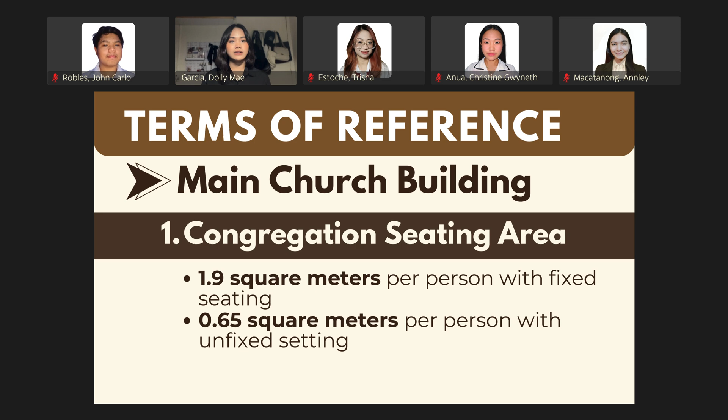Aisles must adhere to minimum width requirements of 0.9 meters for minor aisles and 1.2 meters for major ones. The sanctuary, an essential ceremonial space, should have at least 1.2 meters of clearance around the altar for ease of movement, as guided by IBC standards.

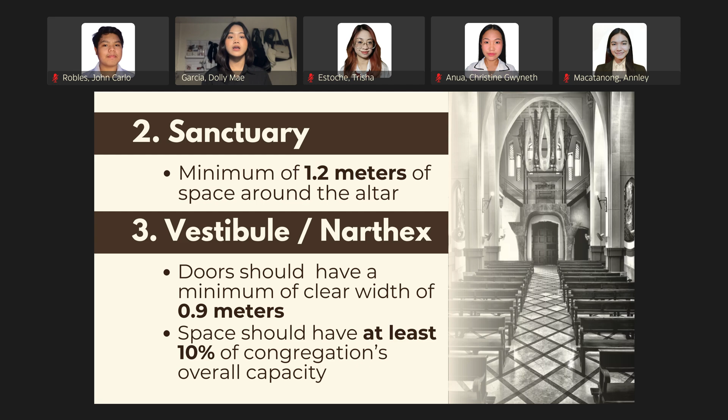The vestibule requires outward swinging doors with a minimum width of 0.9 meters while providing standing room for 10% of the congregation's capacity. Additionally, the choir loft must support a live load of 5.0 kilopascals and offer 600 millimeters per individual to ensure sufficient space for sheet music and instruments.

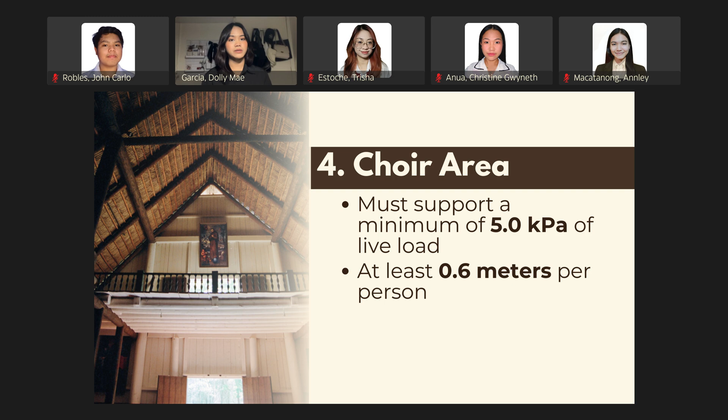The multi-purpose building is designed for various functions such as classrooms, offices, and kitchen facilities. Classrooms must provide 1.9 square meters per person with at least 2 exits if occupancy exceeds 50 individuals, while offices require 4.65 square meters per person. To support flexibility and productivity, it is recommended to use soundproof wall materials and adaptable layouts in office spaces.

Lighting and ventilation play a critical role in maintaining a safe and comfortable environment. Emergency lighting, as required by NBCP Section 1207 and the Philippine Electrical Code, must provide visibility during power failures and emergency situations. Also, exit signs must be illuminated with backup power sources, ensuring functionality for at least 1.5 hours.

Natural lighting should constitute at least 10% of the floor area, ensuring a balance of functionality and energy efficiency, as mentioned in NBCP Section 808. In ventilation, here are some significant points to be considered.

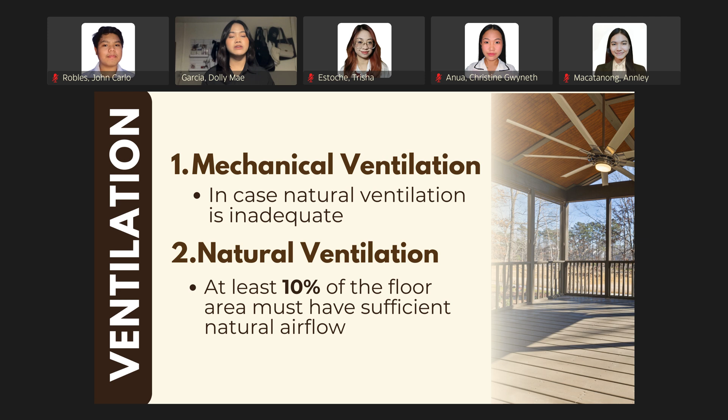An assembly space like a church must include a combination of natural and mechanical systems to maintain air quality and circulation. Following NBCP 808, to have sufficient natural airflow, it mandates openings that cover at least 10% of the room's floor area by having spacious windows, tall ceilings, and an open design layout.

On the other hand, if natural ventilation is inadequate, it is necessary to install mechanical ventilation systems like air handling units and ceiling fans. Next is the exhaust system, adding exhaust ducts that release air externally and adhere to Philippine Society of Mechanical Engineers standards to ensure effective removal of pollutants.

Lastly, to ensure air quality and indoor comfort, it is recommended to utilize HEPA filters or air purifiers to eliminate carbon dioxide, moisture, and odors in a busy area. By adhering to these guidelines, the proposed design ensures functionality, safety, comfort, and adaptability for various uses, making it a welcoming space for the congregation and the community.

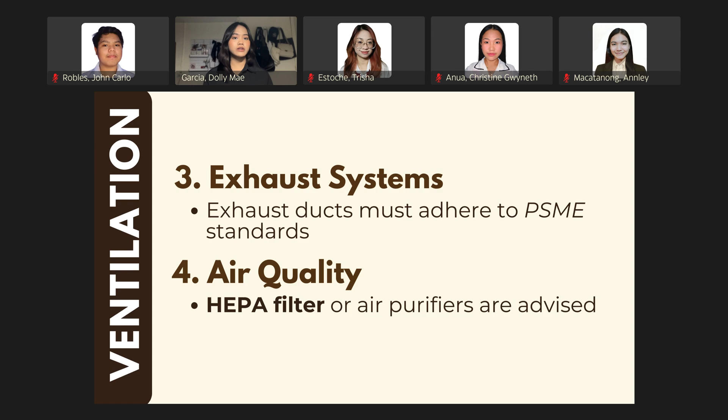The Fire Code of the Philippines emphasizes safety in emergency situations, especially in areas where large groups gather.

For the congregation seating area, the occupancy load is calculated at 0.65 square meters per person, meaning a 1,000 capacity requires a minimum of 650 square meters. To ensure a smooth evacuation, at least 4 exits with unobstructed aisles, illuminated emergency signage, and doors that swing in the direction of egress are required.

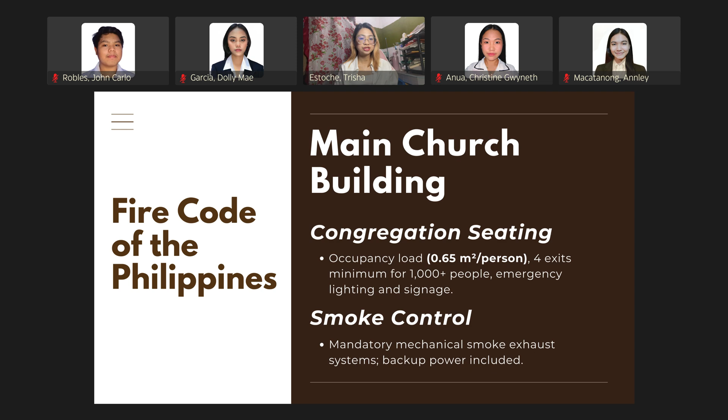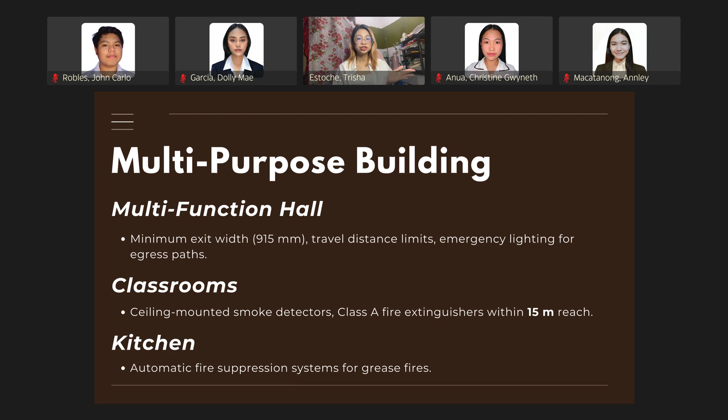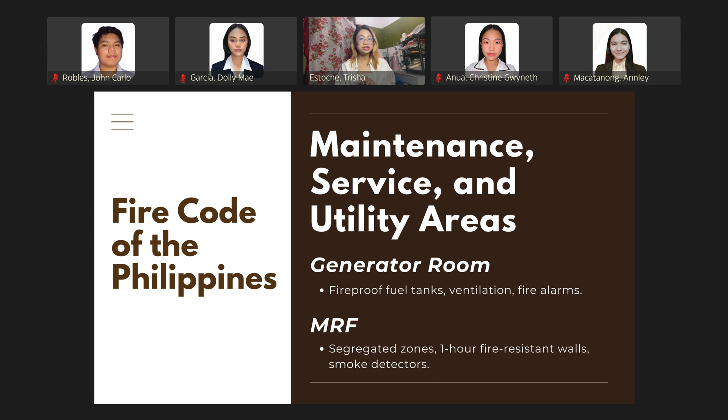Smoke control systems such as mechanical exhaust fans are mandatory to prevent visibility obstructions during emergencies. High-priority areas like the sanctuary will use fire-resistant materials, while public restrooms will be equipped with automatic sprinklers and smoke detectors. Spaces like the multifunction hall, classrooms, kitchens, and outdoor plazas must also comply with fire safety standards, incorporating features like emergency lighting, fire suppression systems, and designated assembly points.

Inclusivity is addressed through BP 344, which ensures accessibility for all individuals, including persons with disabilities. Wheelchair-accessible seating will make up 2% of the congregation seating, strategically placed to provide clear sight lines and proximity to companions. Elevated areas like the sanctuary and choir loft will feature ramps with a 1:12 slope and platform lifts. Public toilets will include grab bars, tactile braille signage, and wide doors for wheelchair access.

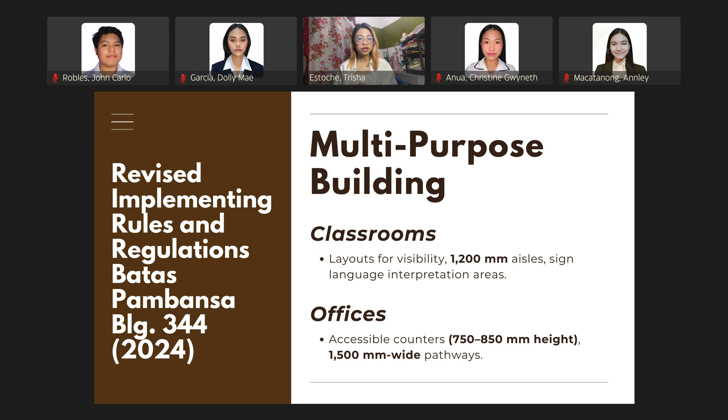Classrooms will have layouts catering to deaf and mute learners with clear sightlines to instructors and interpreters, while offices will incorporate accessible counters and 1,500mm wide pathways. Outdoor spaces will provide designated PWD parking, slip-resistant pathways, and sensory-friendly features like tactile sculptures.

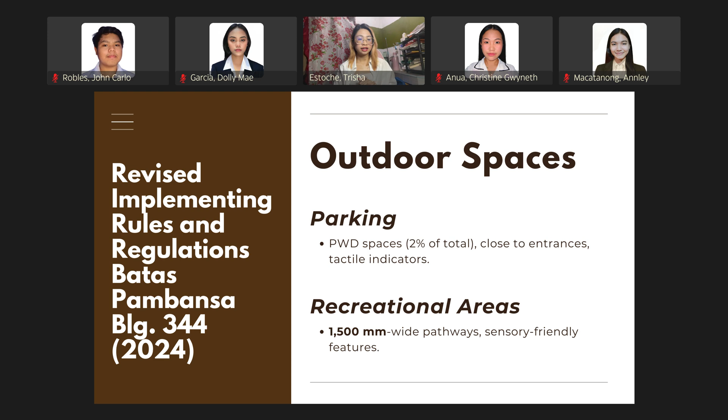The Philippine Green Building Code prioritizes sustainability and energy efficiency. The nave will utilize natural daylighting through clerestory windows and reflective materials to reduce artificial lighting needs. Cross-ventilation will minimize reliance on air conditioning, while energy-efficient LED lighting and renewable energy sources like solar panels will enhance the sanctuary's sustainability. Public toilets will incorporate low-flow fixtures and rainwater harvesting systems for flushing.

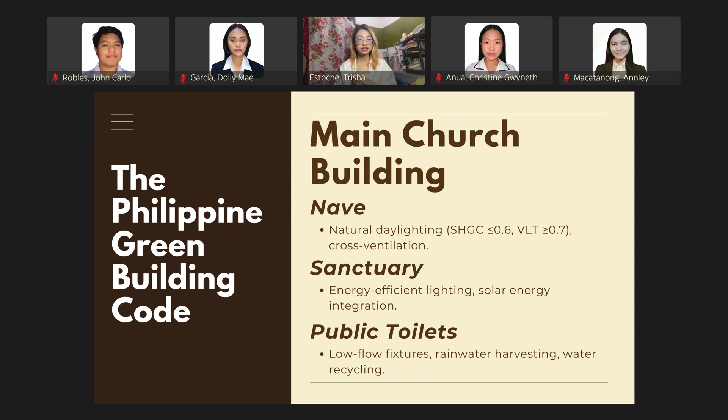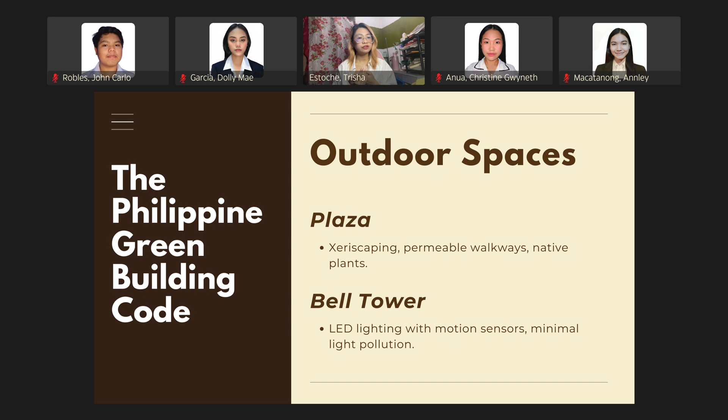The multifunction hall will feature reflective roofing, passive cooling strategies, and ventilated ridges for natural airflow. Outdoor spaces such as plazas and gardens will use xeriscaping with drought-tolerant plants and permeable paving to conserve water. Additionally, the bell tower will include energy-efficient lighting with motion sensors to reduce light pollution. Utility areas will integrate rainwater harvesting systems and sewage treatment plants to manage water resources effectively.

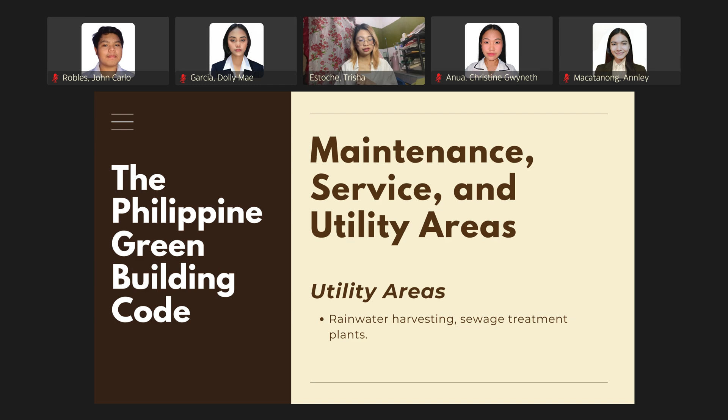In conclusion, the proposed ecumenical place of worship is designed to meet the highest standards of safety, inclusivity, and sustainability. By adhering to the Fire Code, BP 344, and the Green Building Code, the design ensures a forward-thinking approach that aligns with contemporary architectural principles.

Going on to the case studies for both foreign and local, I will share the rich history, architectural brilliance, and sustainable design of the Church of the Risen Lord, located within the University of the Philippines Diliman campus. The Church of the Risen Lord was born out of the post-war spiritual revival in the Philippines, established in 1954 through the efforts of the University of the Philippines Christian Youth Movement as well as the National Council of Churches in the Philippines. It was designed by architect Cesar Concio, a pioneer of modernist architecture in the country. This structure stands as a testament to faith, unity, and innovation.

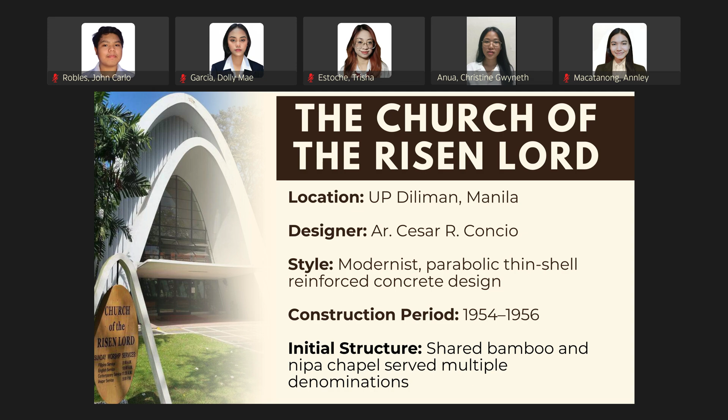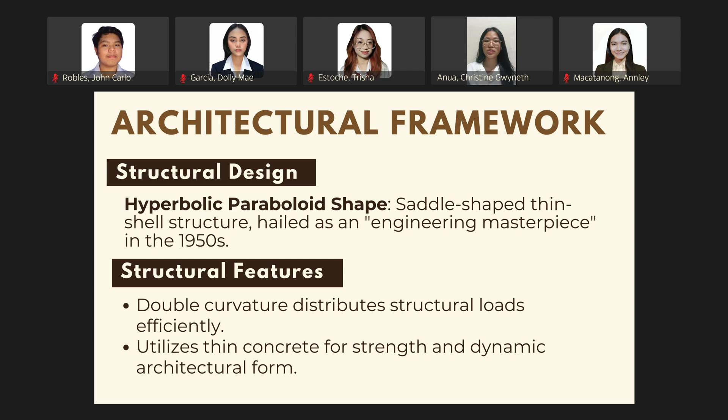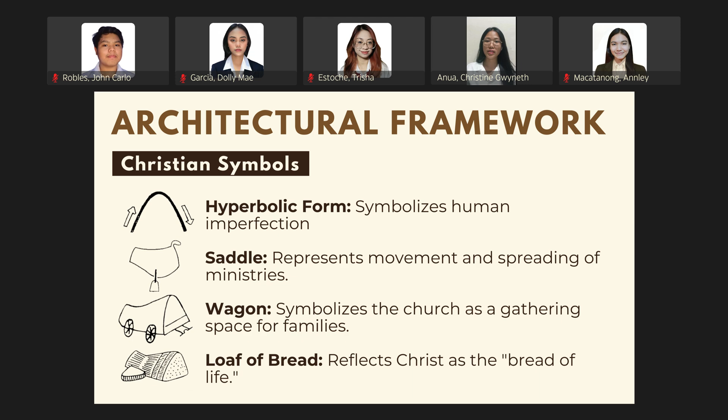Structural architecture is its defining feature. The sanctuary's hyperbolic paraboloid design, often called a saddle shape, showcases advanced tensile engineering. This double curved structure is both visually captivating and structurally efficient, blending modernist aesthetics with the practicality of reinforced concrete. The hyperbolic form symbolizes human imperfection. The wagon is the spiritual gathering space, while elements like the saddle and loaf of bread evoke spiritual movement and community unity. For the purpose of allowing natural light and ventilation to interact with the interior, the lower slopes of the vaulted walls have been strategically perforated with windows and vertical louvers along the longitudinal elevation.

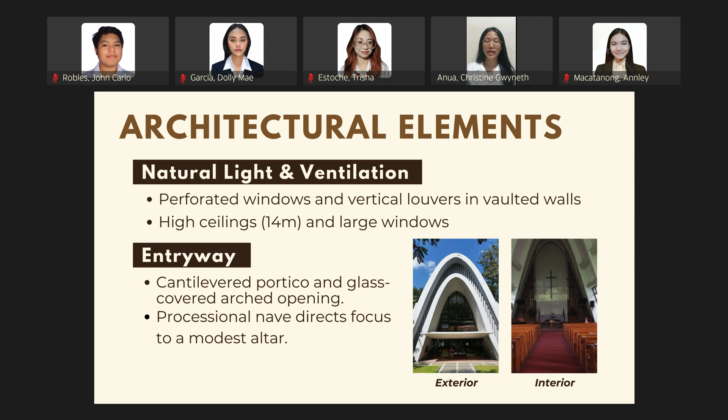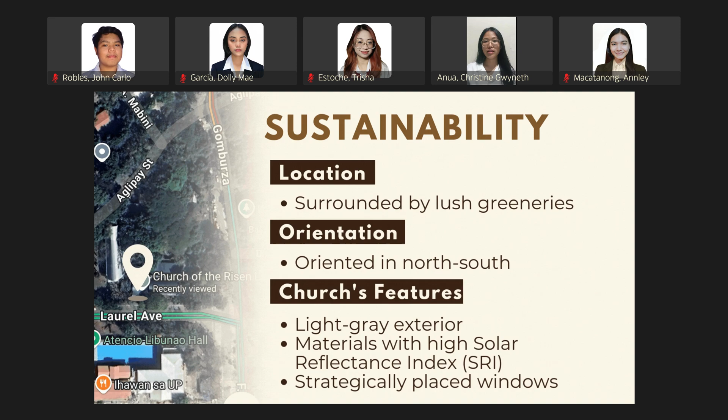Beyond its design, the church layout embodies its ecumenical mission. Its minimalist altar and absence of religious icons reflect its inclusivity and openness. Aside from that, it is also a model of sustainability. Surrounded by lush greenery, its north-south orientation minimizes heat gain while trees provide natural cooling. The light gray facade, materials with high solar reflectance index, and strategically placed windows further reduce heat absorption, leading to reduced energy demands. However, future enhancements like solar panels and high performance glass could make the structure even more environmentally efficient. In conclusion, the Church of the Risen Lord isn't just an architectural landmark, it's a beacon of faith, unity, and sustainability, perfectly blending modern design with its spiritual mission.

Moving forward, I'll take you on a brief journey through the fascinating design and purpose of St. Henry's Ecumenical Art Chapel, a remarkable blend of architecture, nature, and spirituality situated in Hirvensalo Island in Turku, Finland. Designed by Finnish architects Matti and Pirjo Sanaksenaho, the chapel was completed in 2005. Its name commemorates Saint Henry, a key figure in Finland's Christian history.

This Gothic-inspired structure with contemporary features serves as a multi-purpose space for worship, art exhibitions, musical performances, and healing. The chapel's form is like an inverted boat, symbolizing faith and Finland's maritime traditions. Its design also takes inspiration from the shape of a fish, an ancient Christian symbol, reflected in its fishbone-like wooden arches internally.

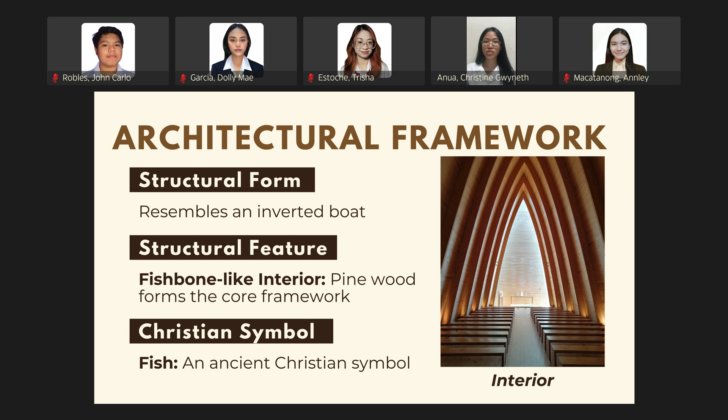These laminated pine arches are integral to the structure and create a serene, organic interior. Natural materials dominate the design. The interior features untreated pine wood, evoking simplicity and warmth, while the exterior is clad in copper. Over time, this copper will weather into a green patina, blending seamlessly with the surrounding forest. The location, perched on a hill, offers breathtaking views of the landscape, further enhancing the sense of tranquility.

Light also plays a crucial role in the chapel's design. A glass strip at the eastern end allows natural light to highlight the altar, creating a spiritual focus. The lighting gradually transitions from dim at the western entrance to bright at the altar, symbolizing a journey toward illumination. This combination of materials creates a space that is both sustainable and deeply connected to its environment.

Furthermore, this architectural design features a striking structure composed of 19 laminated wood arches, spaced 2 meters apart, which creates a sense of freedom and openness. The lighting within the space follows a gradual transition, starting with a dim atmosphere at the western entrance and becoming progressively brighter as one moves toward the eastern altar, highlighting the focal point of the design.

The interior is defined by the use of natural materials, enhancing the organic and serene ambience. The altar itself is also designed with glass glazing, allowing for focused illumination that draws attention to its significance while maintaining the simplicity of the overall space.

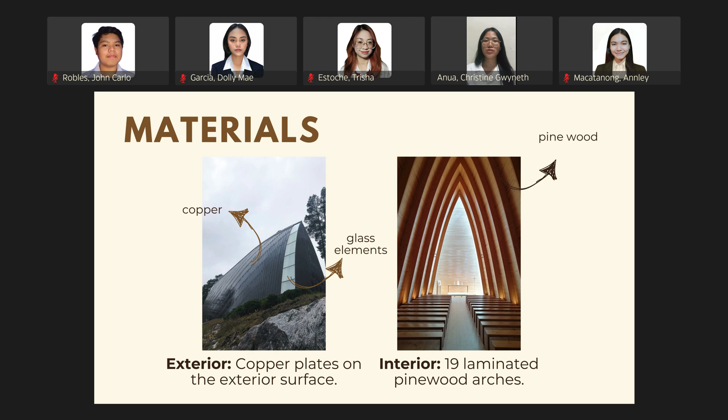To conclude, St. Henry's Ecumenical Art Chapel is more than a structure. It's a masterpiece that integrates spirituality, sustainability, and artistic innovation. While its design is inspiring, refining its functionality could further solidify its role as a welcoming space for all.

For Chapter 3, this analysis lays the foundation for the design strategy, focusing on contextual and environmental considerations to create a sustainable and inclusive architectural solution. First, let us begin with the contextual site analysis. This explores the location, accessibility, traffic conditions, and surrounding land use of the proposed site.

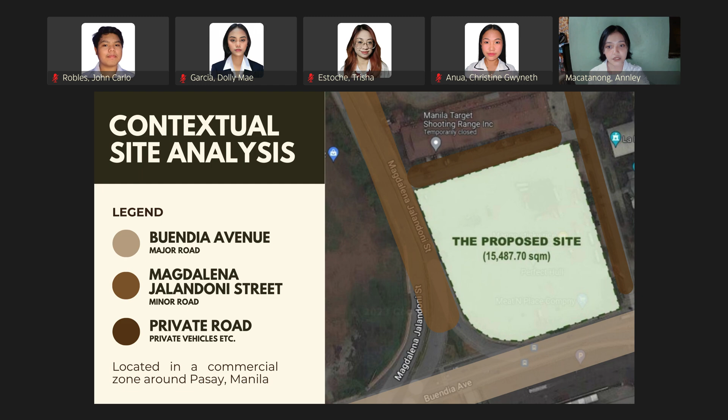The site spans around 15,487.70 square meters along Buendia Avenue, a bustling commercial zone adjacent to the World Trade Center Manila. Its strategic location ensures excellent connectivity, with primary access via Buendia Avenue and secondary access via Magdalena Jalandoni Street. The site is well integrated into Metro Manila's transport network, offering proximity to MRT and LRT stations, such as Gil Puyat Station, and an extensive array of bus and jeepney routes.

Despite this advantage, the area experiences traffic congestion during peak hours due to its proximity to business districts and transit hubs. However, the site benefits from multiple access points in a well-planned road network which help manage traffic flow effectively, ensuring smooth inflow and outflow.

Surrounding the site is a vibrant mix of commercial, institutional, and recreational uses, making it an ideal setting for cultural and religious development. However, the urban density and noise typical for the area may present challenges that can affect the design process and considerations.

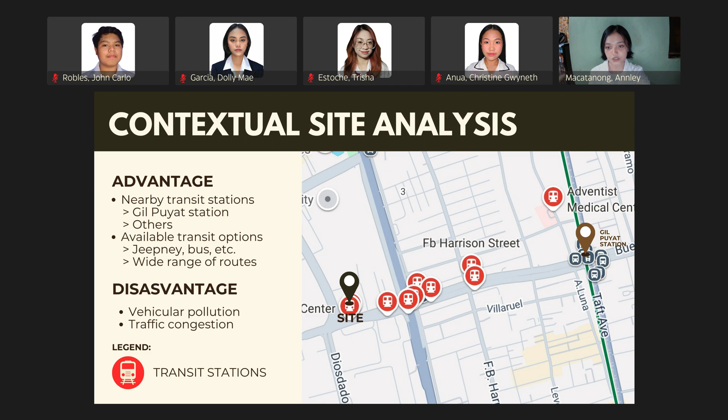Moving forward to the environmental site analysis, we examine the site's climate, topography, and other factors which are crucial in shaping the design strategy. Metro Manila's tropical climate is characterized by high humidity, intense solar radiation, and significant rainfall during the wet monsoon. These conditions call for passive cooling techniques, heat-resistant materials, and efficient drainage systems. Proper building orientation and shading will also be essential to minimize heat gain while ensuring occupants' comfort.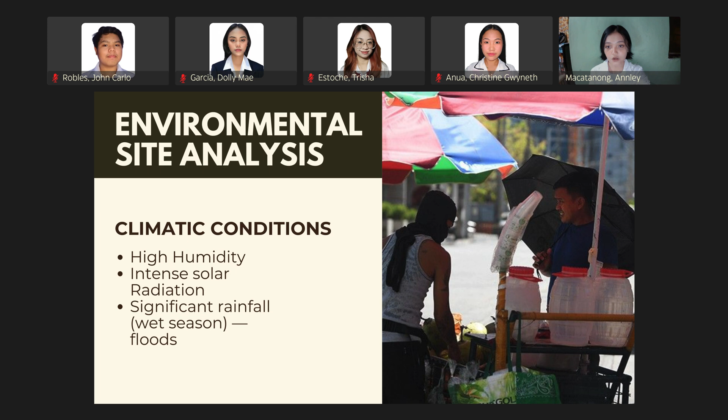Furthermore, the site's flat terrain offers significant advantages, including reduced construction costs and ease of layout planning. However, to avoid visual monotony, we propose incorporating artificial elevation changes such as terrace landscaping and raised podiums. These elements will add depth, hierarchy, and visual interest to the overall design.

However, the existing vegetation of the site is limited to a few scattered trees and shrubs. While minimal, this presents an opportunity for strategic landscaping. By introducing native plant species, we can also enhance the ecological value by creating screened outdoor spaces such as prayer gardens and meditation areas that may complement the worship experience.

Additionally, the site enjoys unobstructed wind flow, making it conducive to natural ventilation. However, its proximity to major roads brings challenges like vehicular pollution and localized heat. To counter these issues, we recommend landscape buffer zones combined with ventilation strategies like cross ventilation and stack ventilation. These measures will also help to maintain airflow, enhance air quality, and create a comfortable microclimate.

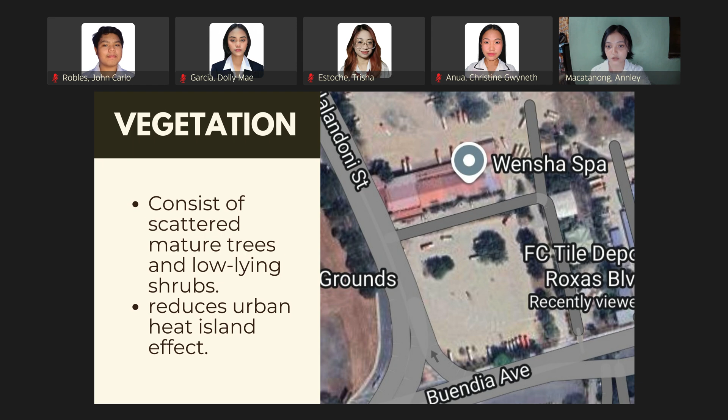Building on these insights, the findings directly inform the architectural design strategy for the proposed ecumenical place of worship. The design must harmonize with its urban commercial surroundings while asserting itself as a cultural and spiritual landmark. In order to achieve this, the design strikes a balance between functionality, symbolism, and environmental responsiveness.

We envision a contemporary architectural language that employs clean lines and geometric forms, reflecting the modernist aesthetic of the neighboring structures like the World Trade Center. At the same time, symbolic features such as a soaring spire or an intricately perforated facade could also emphasize the spiritual essence of the structure and its commitment to interfaith inclusivity.

The use of locally sourced materials such as bamboo composites and natural stone further roots the design in Filipino heritage, creating a tactile connection to its cultural context. Additionally, careful attention will also be given to the building scale by balancing grandeur with human accessibility. The design ensures it feels welcoming while maintaining its iconic presence in the urban fabric.

In conclusion, the site analysis serves as a comprehensive guide for the project, addressing both contextual and environmental challenges. By integrating these considerations, the design will create a sustainable, inclusive, and visually harmonious place of worship. This project aspires not only to be a spiritual anchor of the community, but also a model of energy efficient and context sensitive architecture.

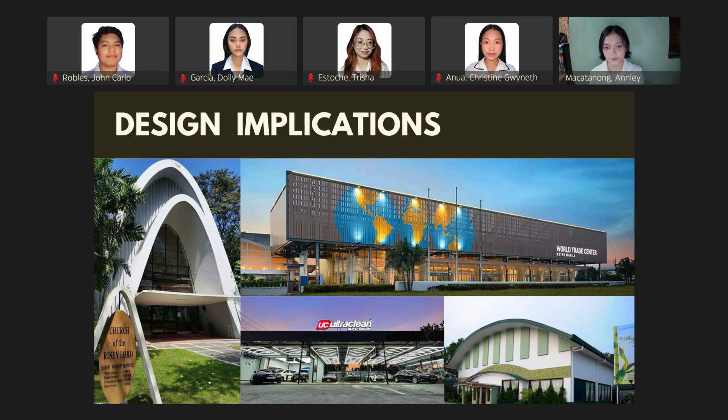Manila is home to over 1.8 million residents, with nearly 79% identifying as Roman Catholic alongside Protestant and Muslim nationals. The proposed energy-efficient ecumenical church aims to serve this diverse population with programs that will cater to the needs of the Roman Catholic families and community members seeking worship, social support, and educational opportunities.

From youth programs and interfaith dialogues to food assistance and environmental initiatives, the church will address Manila's unique needs while it will also serve as a hub for sustainability, promoting green practices in the heart of this urban landscape. By fostering inclusion, sustainability, and community engagement, this church will not only meet the spiritual needs but also create a lasting impact on Manila's people and environment.

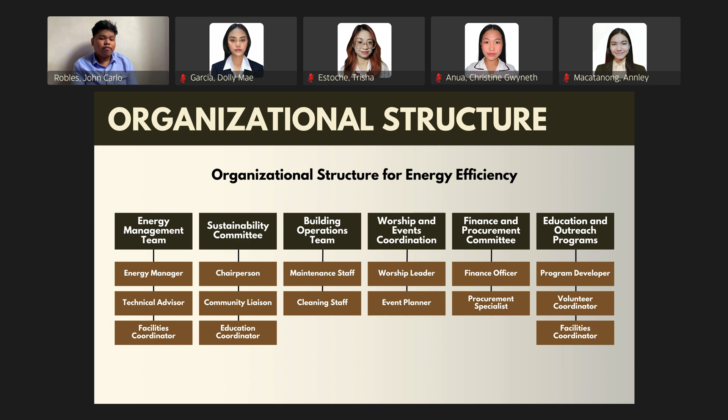Let's take a look at how individuals engage with the environment, creating a respectful and meaningful atmosphere during the church services. Before entering the church, worshippers often take time for personal preparation, setting their mindset for reflection, and upon arrival, the use of holy water symbolizes spiritual cleansing as they enter quietly showing reverence. Finding a seat in the sanctuary is part of the process, allowing individuals to settle in before the service begins.

During the service, engagement with the environment plays a crucial role. Worshippers respect the sacred space, connecting deeply with the setting. Interactions with the greeters are warm and welcoming, while maintaining proper posture and behavior throughout the service ensures respect for the occasion. Speaking of respect, respecting service protocols and preparing for worship further enhances the experience, allowing individuals to fully participate in the sacred ritual.

These behavioral patterns create an environment that fosters reverence and spiritual growth, enhancing the sense of community and devotion within the church. So that concludes our video presentation about the proposed energy efficient, ecumenical, contemporary place of worship.